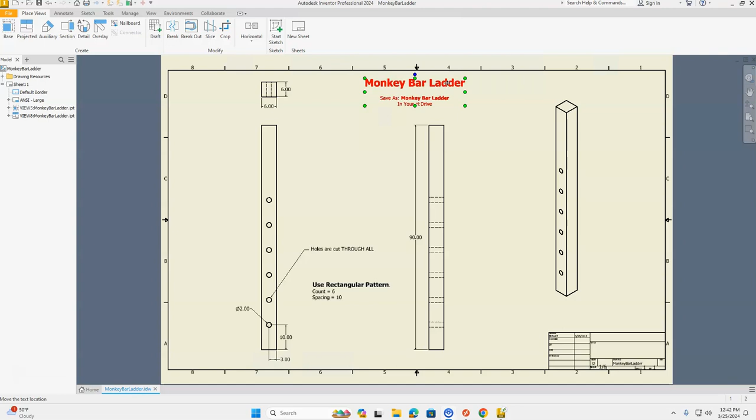Today we're going to take a look at how to create the monkey bar ladder in Autodesk Inventor. If you take a look at our drawing, our plan, our multi-view drawing that's here, we have a rectangle, but this is going vertical, tall. And if we take a look at our top view, we can see that this distance across is 6 inches. And the length of our monkey bar ladder is 90 inches tall. So once again, 6 by 90.

Let's create that first. We're going to go up to the top, orange file. We're going to go to new, and we're going to create standard IPT. And click create. Starting with a 2D sketch, the drawing with the green plus mark here in the left hand corner of our ribbon bar, we're going to select our XY plane and click front in our world view cube. We're going to use our rectangle tool, and once again let's reference our drawing. The width across this is 6 inches and the height of our monkey bar ladder is 90 inches.

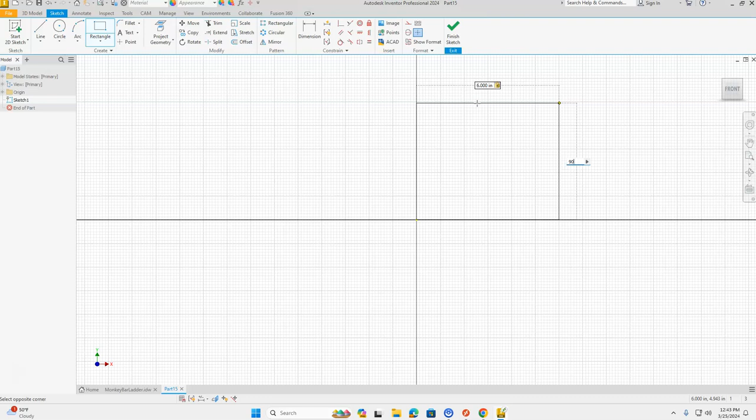Back to our part, get our rectangle tool from the create menu in our ribbon bar, green dot right on top of our origin, click and stretch out a rectangle. Take your hand off your mouse. The distance we're going to type going across is 6 inches. Press the tab key, and the height of this part is going to be 90 inches. And press enter on the keyboard. Press the escape key to let go of your rectangle tool.

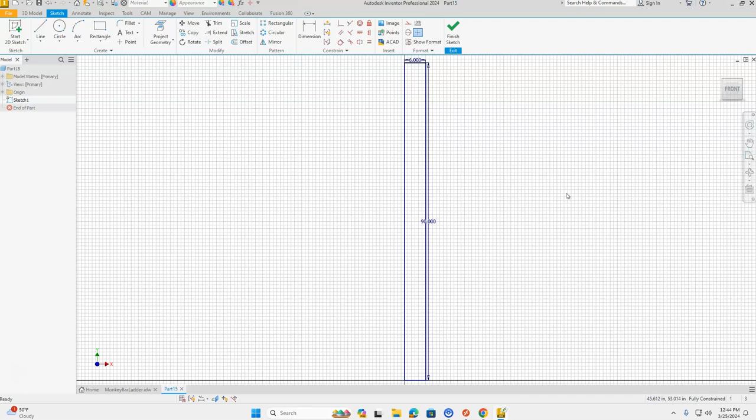And you can see our rectangle here, but it's kind of off of our screen. So let's click front in our world view cube to zoom all. Or you could also click magnifying glass piece of paper in order to zoom out. Okay, we have our overall profile of our part created. Let's green check mark finish sketch. Click home so that we can see all of our part. And then let's go back to our drawing.

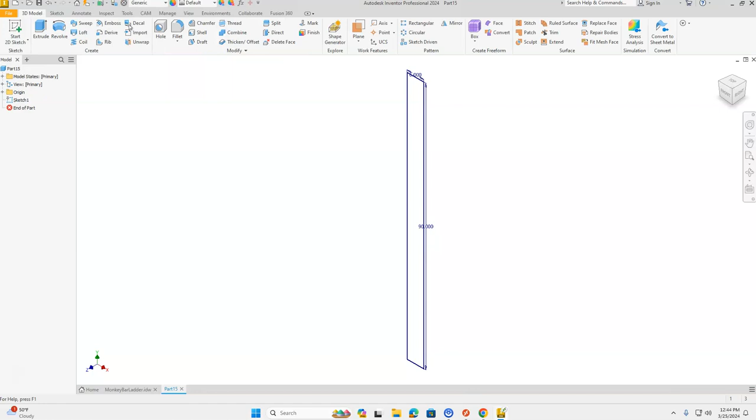If we take a look at our top view once again, the width is 6, but it's also extruded back 6 inches here, and we see that on our plan right here. So let's go extrude this part. We're going to extrude. We want it to go in a flip direction so that that orange arrow is pointing away from us. So let's flip that around. And our distance we're going to change to 6 inches right here. And once you have those created or selected, flip direction and 6 inches, click OK.

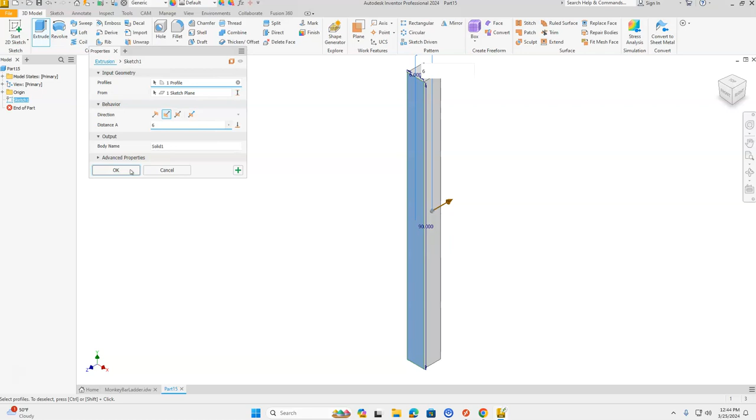Next, let's take a look at those holes. So there is 1, 2, 3, 4, 5, 6 holes going vertical, and we're going to use the rectangular pattern to do that. The hole is 2 inches in diameter. It is 3 inches in from the side and 10 inches up from the bottom. Okay, so let's use our point tool to locate that point. So we're going to take a 2D sketch, place it on our front view. And we're going to take our point tool, just place a point anywhere on your part right here.

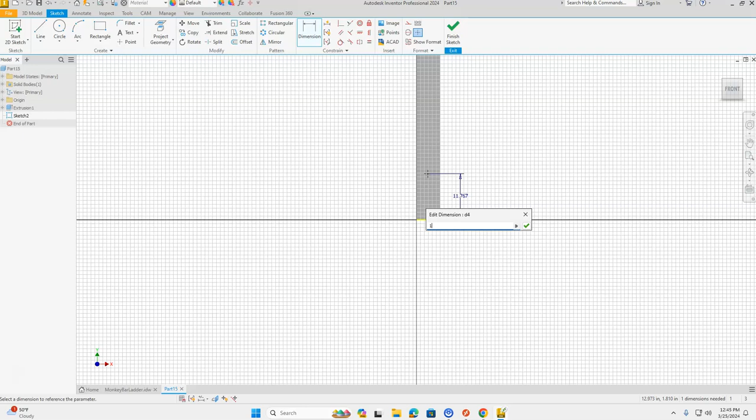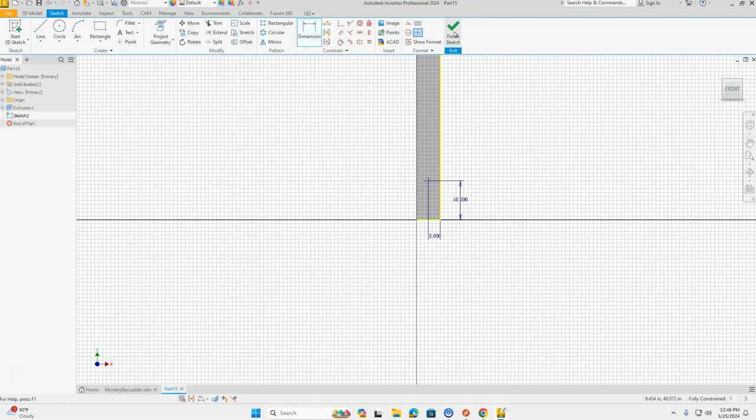Press the escape key. Now we're going to dimension. We're going to dimension from the bottom of our part to the point. When it turns red, click to select them. And this dimension is 10 inches. Click the green check mark or press enter on the keyboard. We also have another dimension to place on here from the right hand side of our part to the point. Bring this dimension down, and this dimension is 3 inches. Press enter on the keyboard or the green check mark. Green check mark finish sketch. We have that point listed on there.

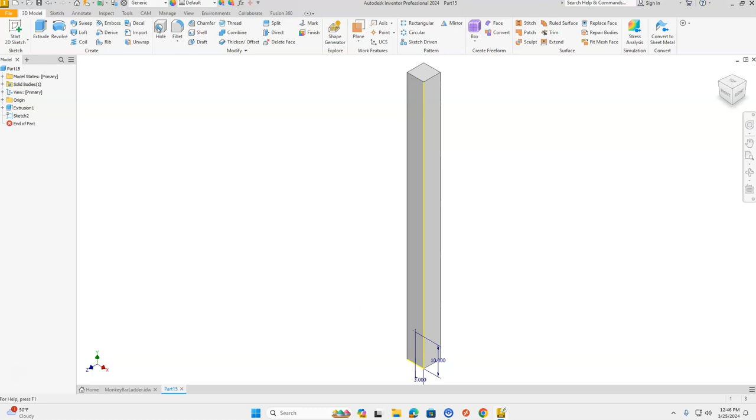Now we're going to take and use our hole tool. So let's take a look at our drawing again. It's a 2-inch diameter hole. And from this note, it says the holes are cut all the way through. So let's get our hole tool from the modify section in our ribbon bar. We want to start out with a simple hole, no seat, and we want it through all. So the icon that looks like a stack of pancakes with a fork stabbed in the middle of it, that is through all. And now we need to change diameter to 2 inches. And then click OK. So we have our hole in there.

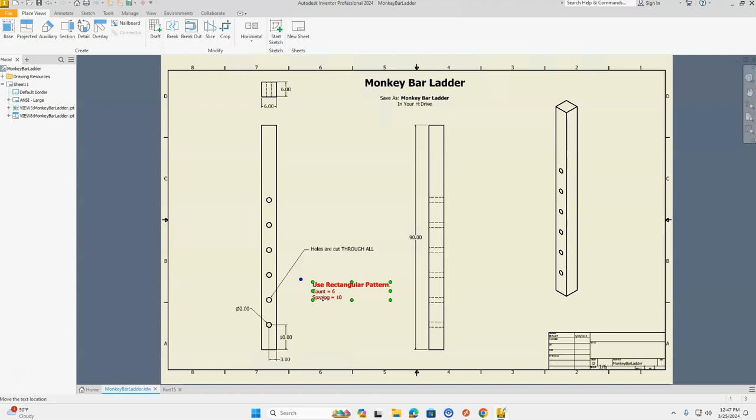That looks great. Now let's take a look at the business of getting the rest of them in here as well. It says use rectangular pattern. We want to have a count of 6 and a spacing of 10. So let's go back to our part. We're going to come up to the top in our patterns section. We find our rectangular pattern. There's also a circular pattern. Make sure you're choosing rectangular pattern.

When this menu opens up, the first thing it wants us to do, we want to select the feature. That's the hole we created. So it's already highlighted blue, so let's come over here by our part, click your hole. When it highlights red, click to select it. You can tell it's selected because it is now highlighted in blue or emphasized in blue.

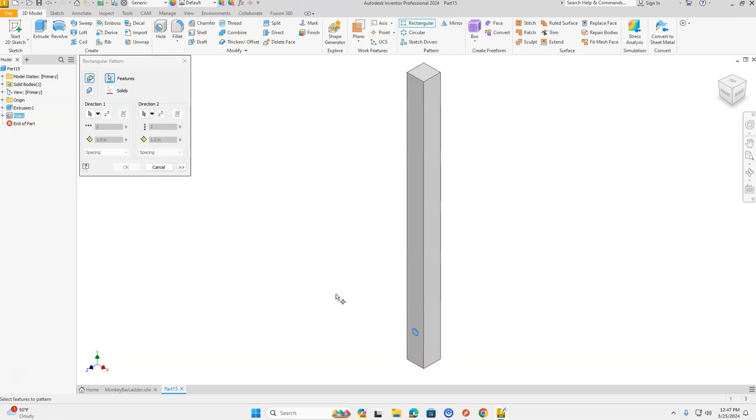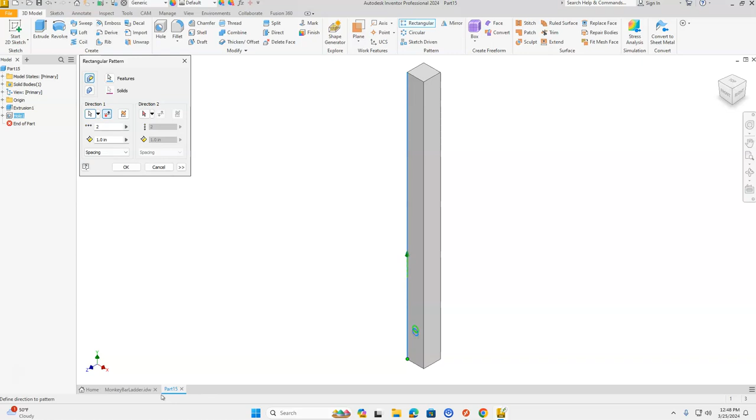Next, we're going to come over here to direction number 1. Click on the direction number 1 arrow, and I want to have my vertical long side of the monkey bar ladder selected, the edge. Okay, now once again, this arrow is pointing down. We want that arrow to go up the direction that the holes are going to go. So I'm going to take and use my arrow right here to flip that around, this icon. Now that arrow is pointing up. Okay, back at my drawing, I want to have a count of 6 and a spacing of 10. Okay, so here, my count, I'm going to change to 6, and my spacing, I'm going to change to 10.

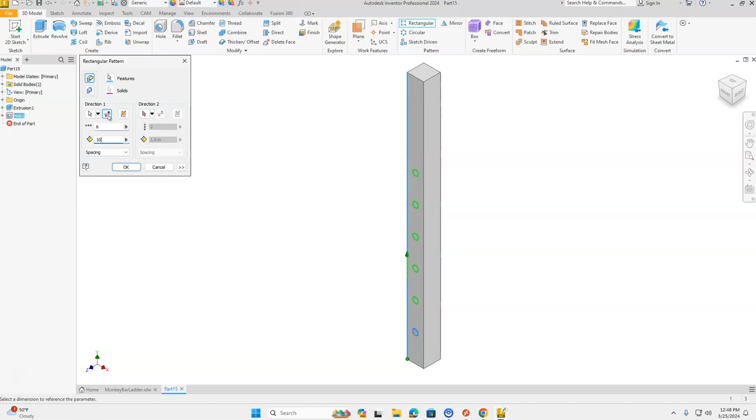So let's take a look at this again. I have my feature selected, that was my hole. I selected my direction, that's the edge, the corner of my monkey bar ladder. I have my count at 6 and my spacing at 10. I also have my arrow flipped so that it goes up. That's this icon right here. If your holes are going down, we need to change that and flip them to make sure they're going up. Then click OK. Alright, we have our monkey bar ladder created.

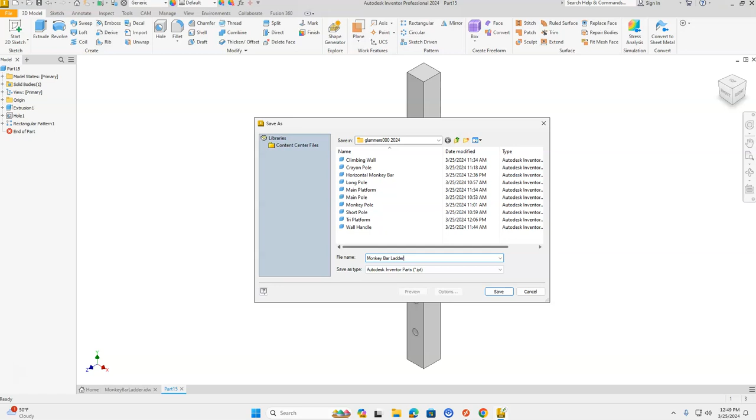Let's save it. Go up to the orange file in the top left hand corner of the screen. Click on File. Go down to Save As. Make sure you're in your H drive. First initial last name 000. And part 15 is not a good name for this part. Let's call it Monkey Bar Ladder. And click Save.